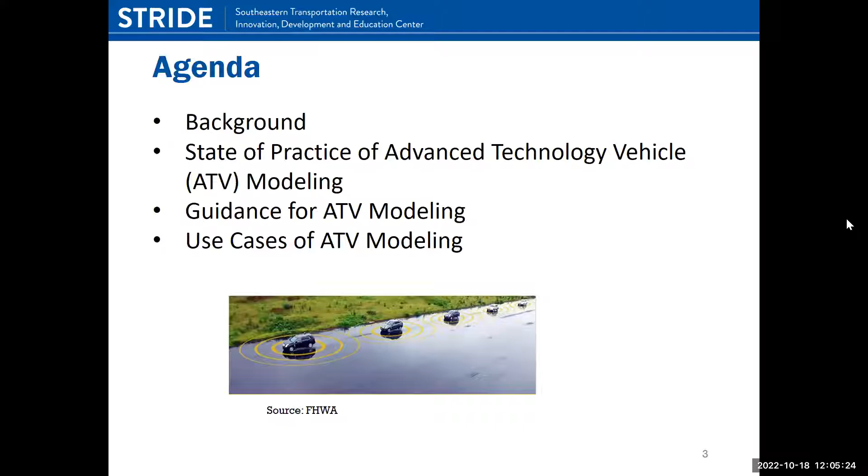So it's expected that traffic simulation will play a critical role in supporting the planning, design, operation, and management decisions of agencies, particularly since we don't expect that these technologies will be on the road for a long time, especially the more advanced features of them and the cooperative features that have not really matured enough yet. So for this reason, simulation will play a major role at this point in time to make decisions about the highway design and the planning and so on.

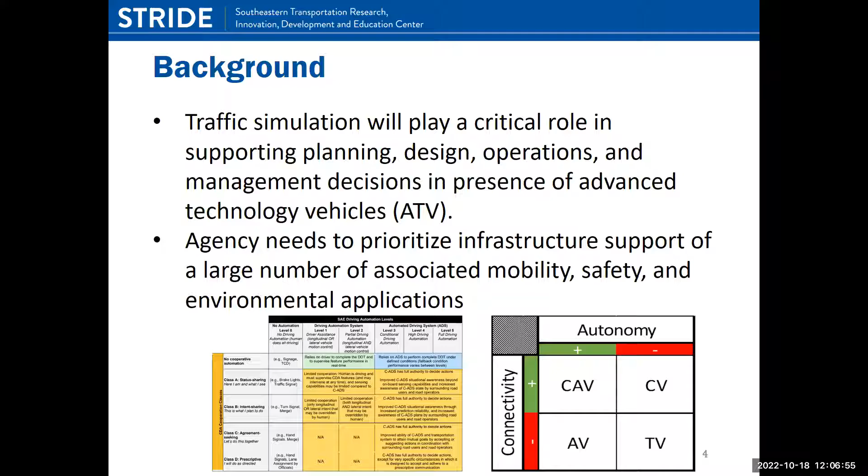The agency needs to prioritize their support, considering the limitation on the budget, and having different types of technology on the road, and each one of those technologies requires a different type of support. We need a simulation model that shows the impact of those technologies, both in terms of positive effects and adverse effects if you don't provide that infrastructure support, both the physical infrastructure and the digital infrastructure.

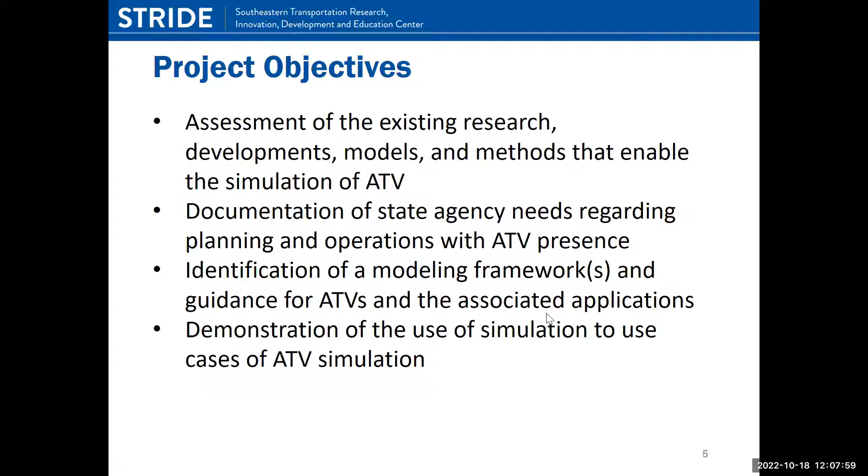So the objective is to assess the existing research, development, models, and methods that are available in the literature. The other objective is to document the state agency needs regarding planning and operation with the presence of advanced technology vehicles. And we use ATV rather than CAV or CV here because we think that this is a more inclusive term, since there are so many different types of cooperation, automation, connectivity, and even electric vehicles and so on. So we use ATV instead of CAV. The other objective is the identification of a modeling framework and guidance, and demonstration of the use of simulation for use cases.

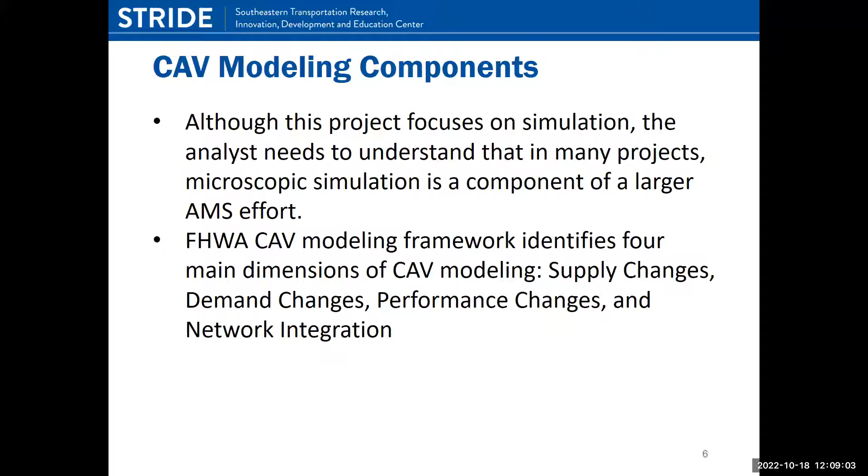Although this project focuses on simulation, it is recognized that the analysts need to have an integrated approach, thinking about all components of modeling that are needed, including how to model changes in the supply in terms of either policy or physical infrastructure or digital infrastructure, demand changes, which normally need advanced demand forecasting models and dynamic traffic assignment, and then performance changes, which we can do using macro, meso, or micro models. And finally, a network integration that combines all of these components.

An important part of this is the identification of the technical approach. Considering that we are in the early stages of simulation, we have to be thinking about what is the best approach to simulate these vehicles, and what is the best combination of tools that can and should be used. So there is no single tool that can provide all the functionality and all aspects of the CAV.

Many of them do not exist. Even in recent years, when they started incorporating some of the CAV features, the focus is more on specific things like dynamic merge, dynamic lane changing, or cooperative adaptive cruise control (CACC), but we realize that there are many applications of ATV or CAV that cannot be modeled.

Consider the operation at the unsignalized intersection and accepting gaps in the traffic, or even a permissive left turn, or red light violation warning, or control of vehicles so that they don't hit the red, or things like that. So all of these would require API type of modeling.

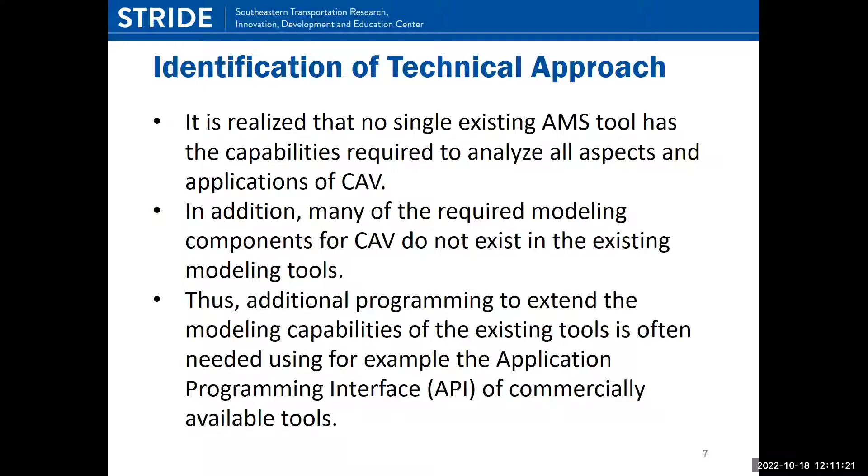Another important aspect of simulation of ATV is the amount of uncertainties associated with this. We don't know when market penetration will be realized for different types of vehicles. We have heterogeneous traffic in terms of connectivity, automation, and cooperation, in addition to different modes on top of that. So that will be an important uncertainty. Also, the algorithms themselves, both from the vehicle side and the infrastructure side, we don't know what the OEM's modules will look like for a lot of these applications.

We can assume, but OEM1 may have totally different use of the data than OEM2, and we may not be able to really replicate all of this. However, we have to accept something generic that represents this type of algorithm.

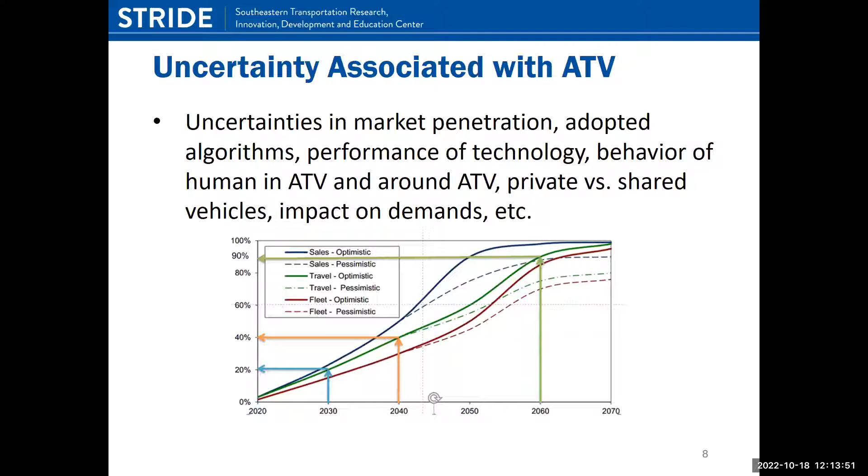Private versus shared mobility, that's also going back to what we said about connecting it to advanced demand forecasting models that can estimate those. Again, the impact on demand. Because of the ease of transportation, are people going to be more willing to use these vehicles, or are they going to travel less?

So, Mike, are you there? Yep. Do you hear me okay?

Yeah. Fantastic. All right. So I'm just going to do a really quick literature review overview and talk about a focus group we did with a number of folks from the state DOTs. First slide, I have absolutely no intention of reading this to you. I know better than that. This is just to let you see that there is a much more detailed literature review in the background. It is available as part of the report if you want to dig into it.

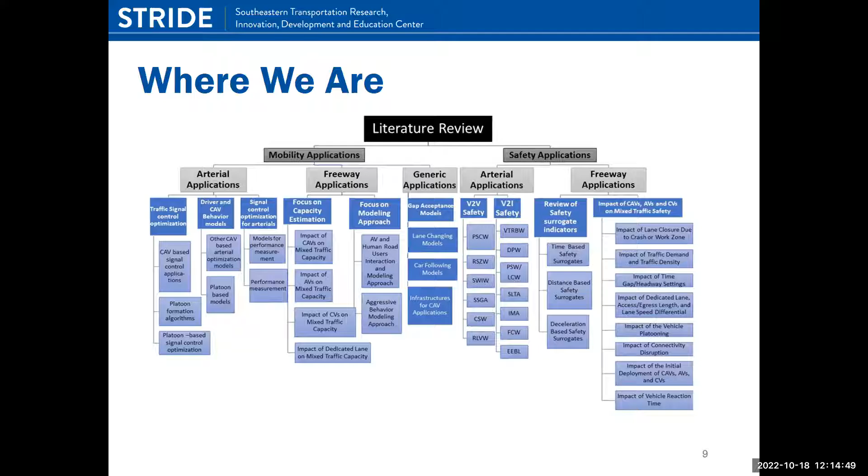What I'm going to get into right now is intended to be high level, a few of the bigger issues, particularly related to modeling and simulation. That is the primary interest in this project. And also, I'll acknowledge right off that this literature review was done probably over a year ago, which at this point, in AV, makes it almost ancient. But I think it still gives us hopefully some good insights. So you can go to the next slide.

So if we talk a little bit about the freeway side of it, there was a lot of literature on freeways. That seems to be one of the primary areas of interest. We did look at analytical, macroscopic, different versions of models, but microscopic does seem to be the tool of choice, at least when they're trying to get detailed operational studies.

And when you look at a lot of the studies, we found that the result is very dependent upon the assumptions. I don't think that's a statement nobody's heard before. We're not breaking incredible ground there, but it is very important when you're looking at these studies to understand the assumptions that they're making. One of the most important tends to be the time gaps.

So what are the gaps that are assumed between the vehicles, and vehicles of different types, maybe an AV as a lead or lag with a human-driven, or two AVs together, or CAV, or two CVs. Those assumptions really start to come into play in the operational and safety results that come out of these models.

We did find that it's still very typical for a lot of the CAV modeling to use a cooperative adaptive cruise control algorithm for the longitudinal control. Where the magic tends to come in is going to be in the lane changing and the weaving, where you'll find each different paper, a lot of different research, handling it in a different manner, how they're going to deal with that.

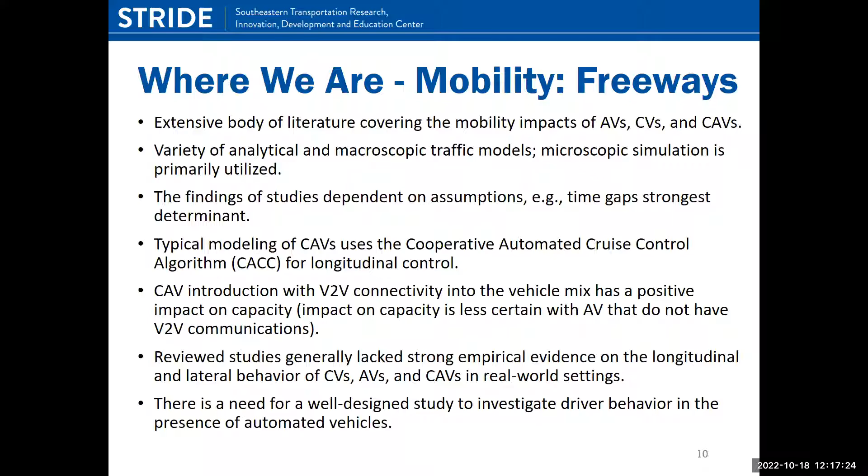We can think on the arterials, there's quite a bit of work looking at the idea of vehicle trajectory control and looking at how to optimize the individual intersections or potentially a corridor. And in that work, you tend to see a combination. Can you optimize trajectories and the signal control at the same time? You'll find work that looks at the individual trajectories. Maybe you could do some sort of platoon optimization, moving vehicles together.

So from a control theory point of view, there is a challenge still with a lot of this work, and then it does tend to be a bit more simplified. The phasings tend to be simplified, maybe not getting into permitted lefts or how to handle the turn movements and such. So as the work progresses and there's more work every day coming out, finding that complexity to better match the real world is becoming important.

It's also not necessarily clear in some of the work exactly, again, how the human drivers are going to be reacting, and are we properly capturing the impact of human drivers in these studies. And there have been some field studies that have done a good job of illustrating how complex this is going to be when we get into it.

Some of the significant gaps still seem to be tying in the sensing abilities and communications required to make these systems work: communicating with the infrastructure, communicating with the vehicles, and if there's a driver, what's going to be involved there. Some of the gaps we noticed are the realism of some of the models in capturing the capabilities and the various functions of the intersections, and looking at some of the methods that could be used to leverage CAV technologies.

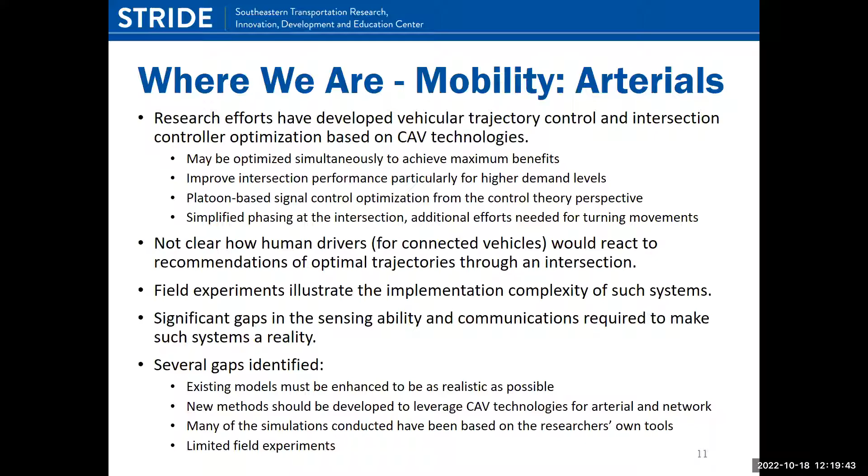Safety. Well, there's a lot on safety. Safety is one of the driving forces behind CAV. There's a ton of work out there on V2V and V2I and all the different variations. I'm not going to read all these, but you can find work on almost all of these. There's been testing on a lot of these. So this is definitely a good topic.

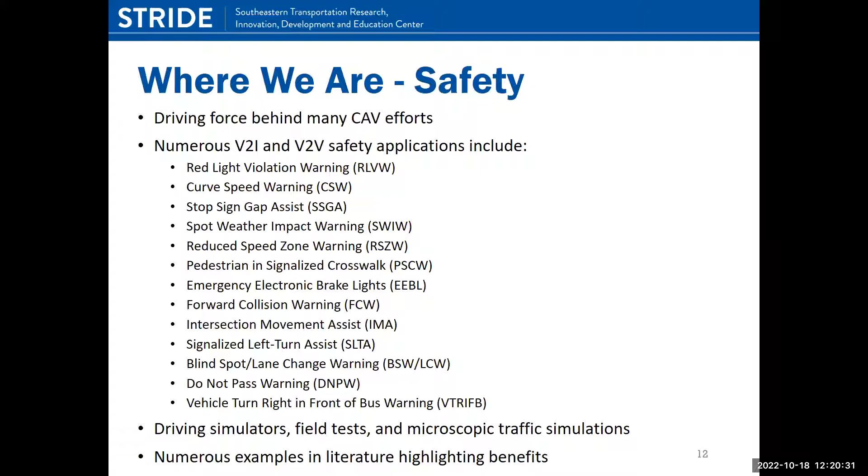A lot of the work has been done; there's also been work now done in driving simulators, there's field tests. A lot of this exists on cars that are being sold today. And then again, the microscopic traffic simulations, as we've talked about, seem to be sort of the place people like to go. And you'll see throughout the literature a lot of examples highlighting the benefits. Let's go to the next slide.

But as we get a little deeper and we start thinking about the CAV and the AV part of that, well, now there's not quite as much out there, and we start again getting into the assumption issues and the penetration issues that Mohammed was talking about earlier. And one of the ways people are trying to address this is through surrogate safety measures. They've been around for a long time. We all have some familiarity with that. The idea, of course, is combining the surrogate safety measures with simulation modeling to allow essentially a simulated version of the surrogate safety.

Surrogate safety, just at the highest level, we tend to be thinking about frequency, severity, and duration. We're trying to essentially get a sense of crashes, right? What's the likelihood? What's the severity? How long? Some examples: time to collision, reaction time, deceleration rate. There's post-encroachment time. There's a long list of these.

What we have found when you look at the literature is that research on applications using connectivity is stating that this can reduce response time, decreasing the conflict likelihood. Also, as the market penetration increases, you'll see a decrease in speed variation, again potentially reducing the likelihood of crashes. But we also did see studies that had conflicting results. We'd find some studies for, say, a low AV penetration rate that would say it might increase the number of crashes, and a study on the other side saying the exact opposite, that it decreases the number of crashes.

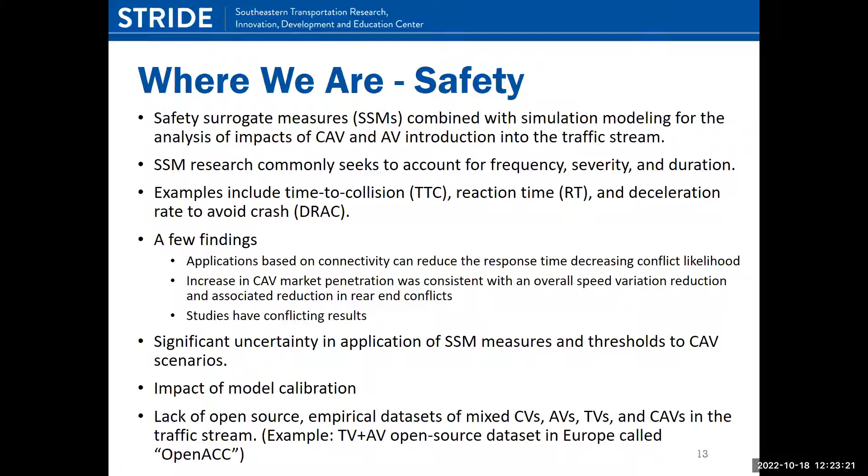One of the issues that then also starts to pop up is model calibration, and there is some discussion in our report about model calibration. That really starts to become important, particularly when you don't have significant field data sets. How does one calibrate? Now that is starting to change. There is a lack of open source data, although some data sets are starting to exist. I listed one example there that the team has been able to get hold of and is starting to look at. So those data sets are starting to become available, but they are still very sparse. I think it's going to be some amount of time before we have a really good sense of that. Can you go to the next slide?

So we did a focus group. It was November 2020. It was online with state DOTs, mostly within the southeastern United States. And we were focused on simulation modeling needs when it comes to AV and CAV technologies. The topics were broad. We wanted to talk about their efforts, their plans, their barriers, their challenges, really go through it all. Can you go to the next slide?

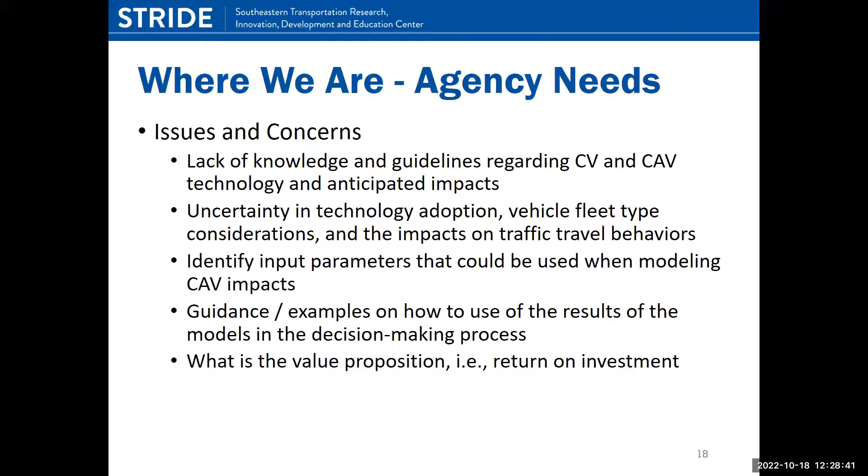Performance metrics. There was some good discussion on the performance metrics. I think one of the issues that was interesting to hear was really comparing the technology, what improvement you would receive when you use this technology versus if you just use sort of traditional improvements, or what's the marginal improvement of adding this technology to a traditional infrastructure system. And then also, how could you use this to maybe replace something that you would have done in a more traditional way?

So those comparisons, and again, you can see that sort of tie back to this return on investment and understanding. They found it very important that they wanted to assess both safety and mobility impacts. Although, interestingly, and I didn't put a specific bullet in, they said currently a lot of their deployments really aren't based on those assessments simply because they can't do it. A lot of the current deployments are based more on, we're going to try this, we're going to get out there, we're going to do the pilot test and see how this goes. They're not able to do these analyses ahead of time, but they want to do safety, mobility, impact analyses.

Another interesting question was, of course, how the technology is going to integrate with the current approval processes, such as interchange modification and facility capacity addition. Right, there's a standard set of processes. You have your environmental impact statements, and you have all these reports and analysis that has to be done before you do these large modifications. How do they layer CAV into all that?

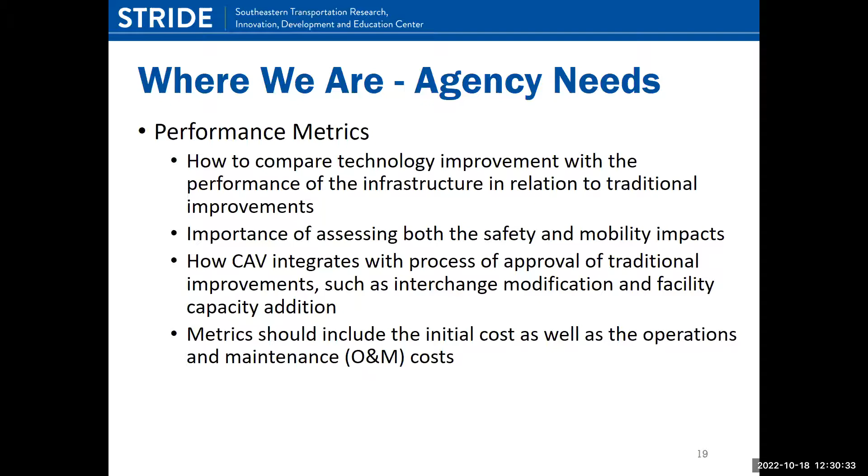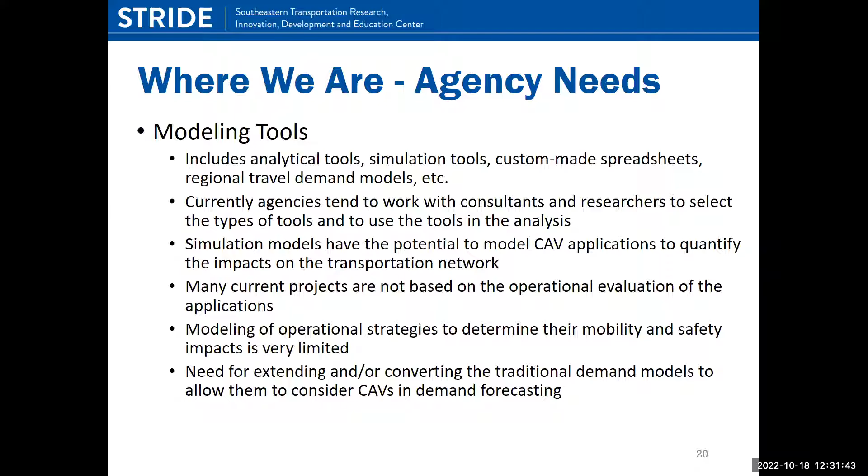I think that's actually my last slide. You go to the next slide. So that's sort of our update of what the agencies were thinking.

Thank you, Mike. So as Mike said, one of the main needs of the agencies that was specified was to have guidance on how to use these tools and how to select the tool and the approach and so on. So a major part of our effort was to develop at least an initial guidance that can be used as a living document, updated as we have more information about CAV in general.

What we did then is to start with the existing guidance from the FHWA. Many of you on the call are familiar with the FHWA Volume 3. This is the 2019 version that has basically 7 steps of simulation, starting from analysis, planning, and scoping, data collection and analysis, base model development, verification, and then calibration, and this is a mistake, calibration and validation, alternative analysis, and analysis documentation.

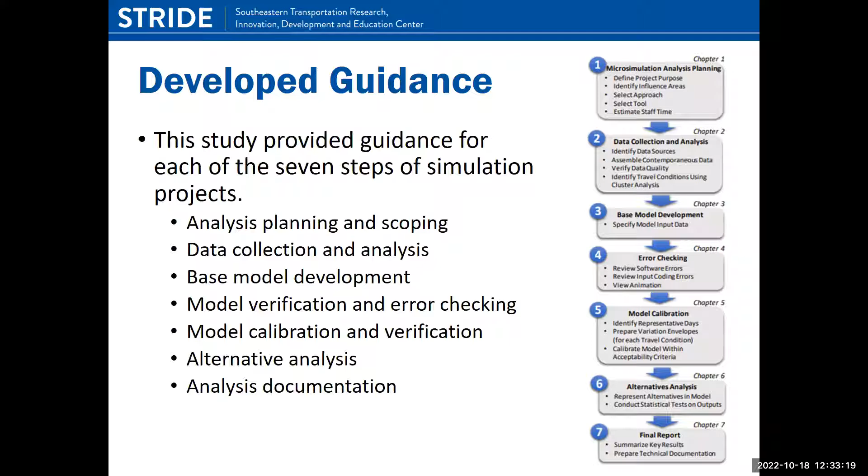So we just revisited each of these steps and inserted information that is specific to CAV. So for example, in analysis, planning, and scoping, we talk about the analysis dimensions and what the approach is for each dimension. By dimension here, we are talking about the level of the modeling or the component of the modeling. Does it include demand forecasting or the impact of the supply component, which is the physical and digital infrastructure, and so on? Does it include dynamic traffic assignment, route choice?

And then what is the approach to use that? How are we going to treat the uncertainty that we have been talking about up to this point? What are the performance measures? A lot of the performance measures that are used for regular traffic may be still applicable, but a lot of new measures are also important. For example, more and more stability metrics and other vehicle-level types of measures become important as we talk about the reduction in oscillation and so on, and looking at safety measures as an important measure, and so on. And then analysis tool selection, data requirement and availability, identification of the verification, calibration, and validation methodology.

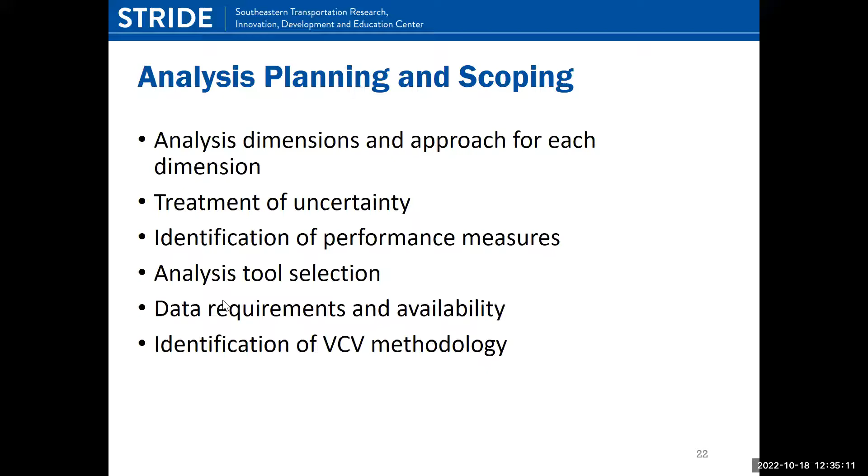So as we mentioned, there are approaches to modeling ATV, and we detailed that. So one option is to just adjust the existing model parameters through changing the parameters in the calibration process to reflect, for example, ACC and CACC, and that is something that was done in the recent releases of some of those tools that consider the behavior of those vehicles. So for instance, the Wiedemann model and TransModeler, the General Motors model has been fine-tuned. The parameters have been fine-tuned to reflect the car-following behavior of CACC and ACC, and same thing with lane changing, gap acceptance parameters, reducing the stochasticity to account that the vehicles are going to be more uniform in accepting gaps and lane changing.

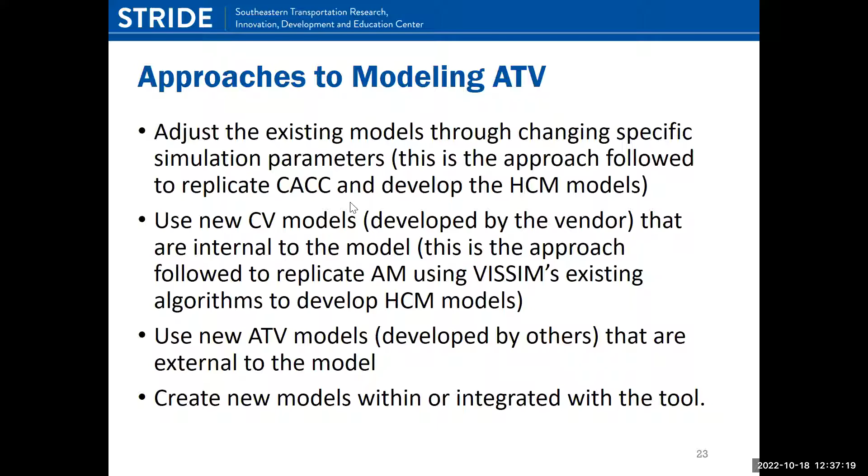Another option, if that is found to be not available for some of the applications or not adequate for what we are doing, is to use new connected vehicle models that are internal to the model. This is the approach followed to replicate VISSIM's existing model and the modeling of the car following and merging operation. Or use new ATV models developed by others, or create new models within or integrated with the tool. Also, there's opportunity for using software and hardware in the loop as part of the simulation to replicate as much as possible the performance of these ATVs. We also have done this after we produced the final report for phase 1. As I mentioned, we are working on phase 2.

So we compared some of the existing tools and how they model different types of applications or features of ATV. And the HCM and the tools that have incorporated the HCM procedures have procedures to account for the impact of CACC, cooperative adaptive cruise control, and dynamic merge, and so on, on the capacity using capacity adjustment factors. And they have those for freeways, signalized intersections, and also for roundabouts. This is the table that we took from the HCM.

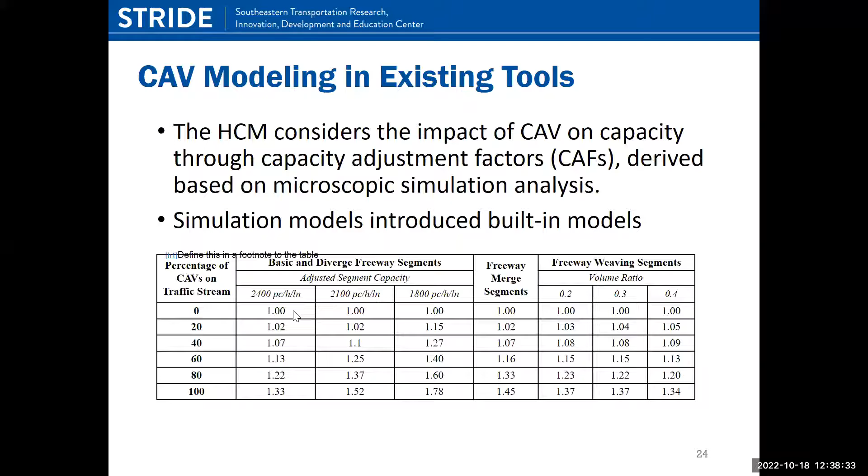But simulation models also introduced built-in models. For example, VISSIM contains built-in functions that allow the user to model 3 driving behaviors: cautious, normal, and all-knowing, based on data collected from the CoEXist project. The cautious driving is supposed to replicate automated, not connected vehicles, while the normal and the all-knowing are supposed to replicate the connected automated vehicle, with the all-knowing replicating more advanced features of cooperation and automation. And when we did the comparison between these tools, we found that the cautious driving actually gives you capacity that is lower than the capacity of human driving. And that is because they are more cautious when they don't have connectivity. The cautious is supposed to reflect the autonomous vehicle somehow.

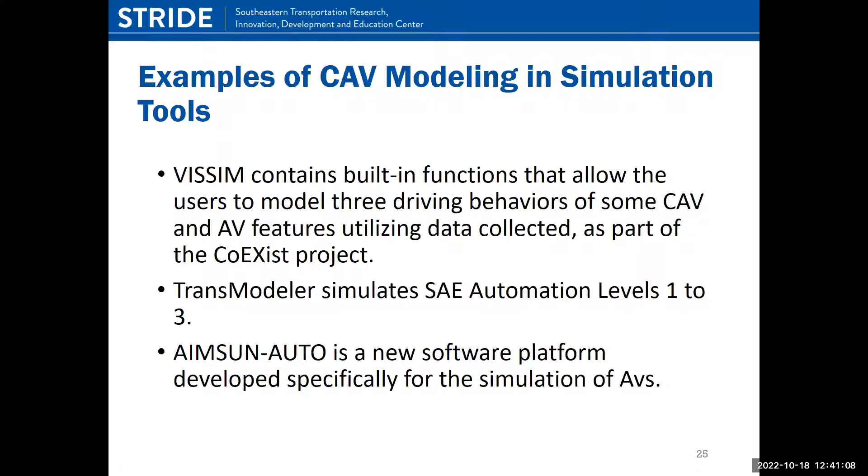TransModeler simulates 3 different levels of the Society of Automotive Engineers, and we compared the HCM with TransModeler with VISSIM, and we found that these tools produce, in a lot of aspects, totally different results. Although some of them, when you change the parameters, can get closer. So the conclusion is that one needs to be careful when using existing tools and be sure that they produce compatible results. A lot of the time people use Highway Capacity Manual procedures for screening of the alternatives, and then they use the simulation model for more detailed analysis of the alternatives. But if the two models produce different results, then you will find that the findings from the screening do not support what the detailed simulation is finding. So that's something that modelers have to be cautious about.

Calibration and validation: additional calibration measures are needed, maybe at the trajectory level and so on, compared to the human-driven, where we used macroscopic measures rather than trajectory measures for a long time. Although we now also have a recommendation to get more into trajectory-level calibration.

The calibration should be done for different conditions, such as different congestion levels, lighting, and adverse weather conditions. When considering ATVs, field data may not be available. In those cases, we need to depend on literature and information we get from technology developers. And then it's always good to compare the results from our analysis with what was reported in the literature, to be sure that we are not producing results that are illogical because we assumed something that is not.

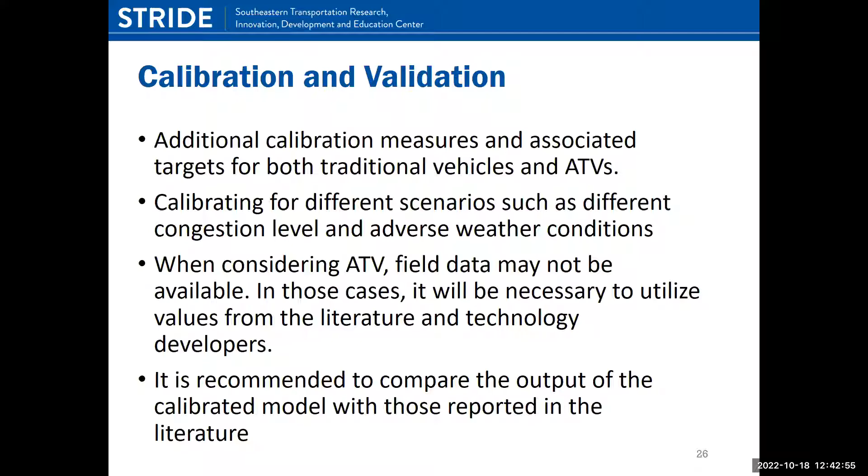For example, if the literature or even the Highway Capacity Manual says that the CACC capacity modification factor was 1.6, that means a 60% increase in capacity. Then if our model tells us that the increase in capacity is 200% or 150%, there is something wrong in our assumptions there. Alternative analysis is also important.

It should consider, depending on the objective and scope, supply, demand impacts, and performance impacts. So, I should have said there, depending on the scope, an analyst must seek to gain the latest knowledge or sense regarding various ATV indicators, such that we can compare and try to get the best estimation of those indicators.

And then sensitivity analysis is recommended for alternative analysis because of the large amount of uncertainty. So then you can do a risk analysis or sensitivity analysis, and then from those you would recommend the best alternative, rather than depending on one run with one assumption. You need to have an assumption from a distribution rather than one deterministic kind of assumption. And that could include the market penetration and also the performance of the ATV in accepting gaps and car following and so on.

But the recommendation, if we're going to do sensitivity analysis, is we should test the boundary conditions for each characteristic while fixing the other ones. Obviously, you could do more detailed analysis that includes risk analysis with Monte Carlo simulation, but that requires a lot of computational effort and so on.

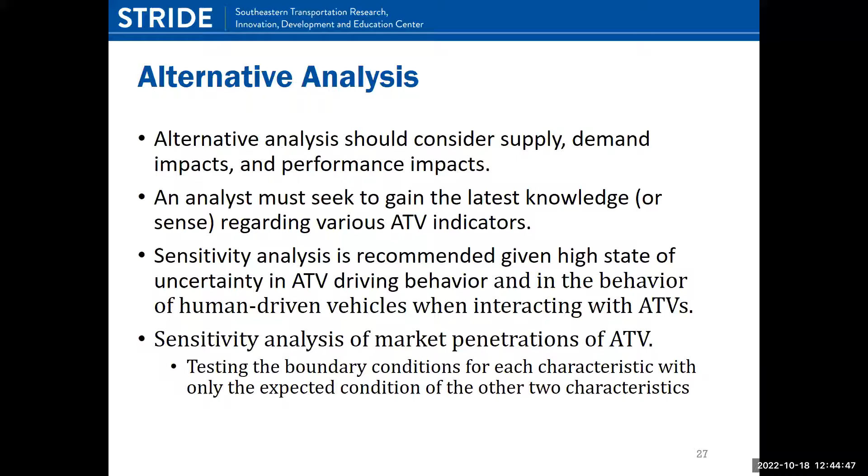The case studies that we did for this project can be divided into 3 major themes: arterial safety, arterial mobility, and freeway mobility. Under arterial safety, the case studies that we investigated included red light violation warning, unsignalized intersection gap assist, and signalized intersection left turn gap assist. The freeway mobility case studies included CAV operations in mixed traffic, where we have AVs, TVs, CVs, and CAVs. The second case study investigated the impact of a dedicated lane for freeway operations in the presence of AVs and CAVs. And the last one looked into optimizing operations at freeway weaving segments in the presence of ATVs.

The arterial mobility case studies were 2, and they explored signal control optimization and evaluation of operations and environmental quality at interrupted flow facilities. As Mohammed mentioned, we won't be able to go through all of the 8 case studies that we did for this project. I'm just going to cover 2 of them here: the red light violation warning and the impact of dedicated CAV lanes. Can you go to the next slide, please?

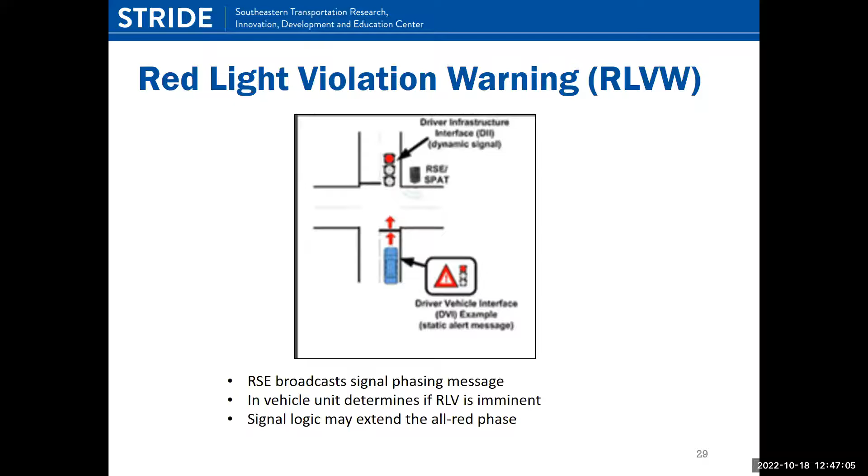So coming to the case study objectives and methods, the main objective of the red light violation warning was to assess the safety benefits of this technology. In order to do this, the team needed a baseline stopping probability at the start of yellow that could be used for calibration of the simulation model, and also a robust method of quantifying the impact of red light violation warnings. For this, the team relied on surrogate safety measures.

Moving on to the methodology part, this study was a simulation-based study. The team used VISSIM's COM API to implement the red light violation warning. The model parameters that impacted the probability of stopping were identified first, and then using the previous research, the baseline model was calibrated to match field stopping probability. Following these steps, the red light violation warning safety effects were evaluated using SSMs.

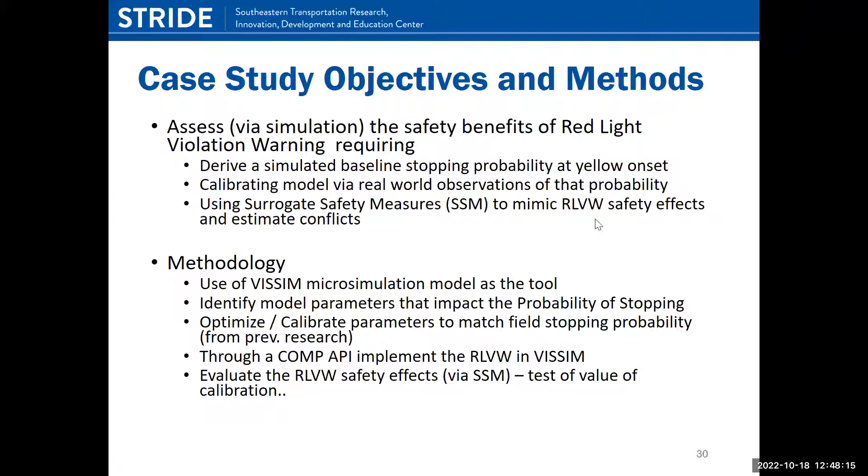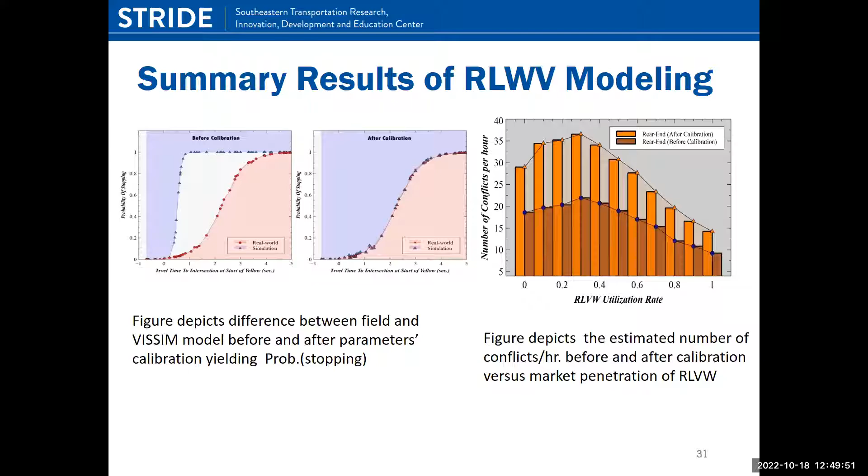Changing gears to the second case study, which is assessing the effect of CAV dedicated lanes on freeway operations. As we expect, AVs and CAVs will impact mobility, safety, and the environment. And based on the review of the literature, the impact is expected to be positive at high market penetration rates, and there's a consensus of the studies that have looked at this. But at low market penetration rates, however, there's no consensus, and the majority of the case studies show that there's a negative impact on mobility and safety.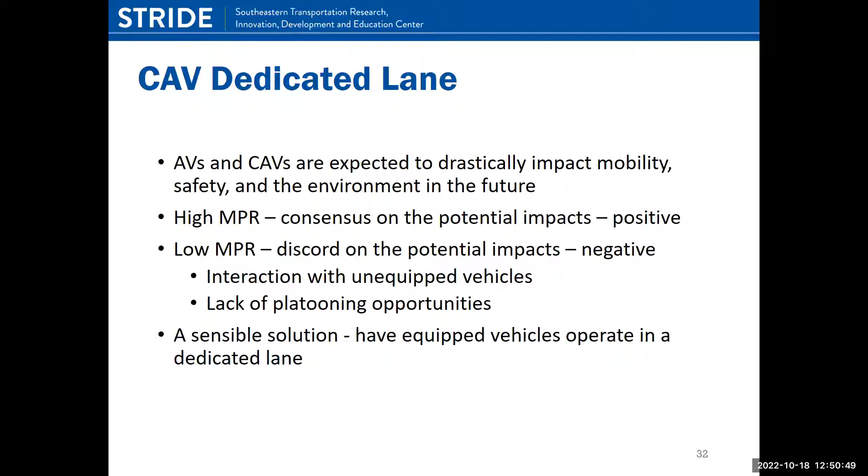Two factors could probably be the reason contributing to this disparity and the negative impact: interaction with unequipped vehicles and lack of platooning opportunities. A sensible solution would be to put these equipped vehicles and operate them in a dedicated lane. Next slide, please.

Again, we conducted a simulation-based study to investigate the impact of the dedicated lane on freeway mobility. We simulated a real-world freeway facility located in Raleigh, North Carolina, in SUMO, which is an open-source simulation tool. The facility had 3 lanes in each direction, and the leftmost lane was dedicated to CAVs, while the right 2 lanes were used by other vehicle types. We had 4 vehicle types in the case study, including AVs, CAVs, TVs, and CVs as shown here.

The longitudinal behavior of the 4 vehicle types was modeled differently. For AVs and CAVs, we used W-99. For TVs and CVs, I misspoke there, I'm sorry. For AVs, we used Xiao et al.'s model, and for CAVs, we used Xiao et al.'s and Milanés and Shladover's model. Next slide, please.

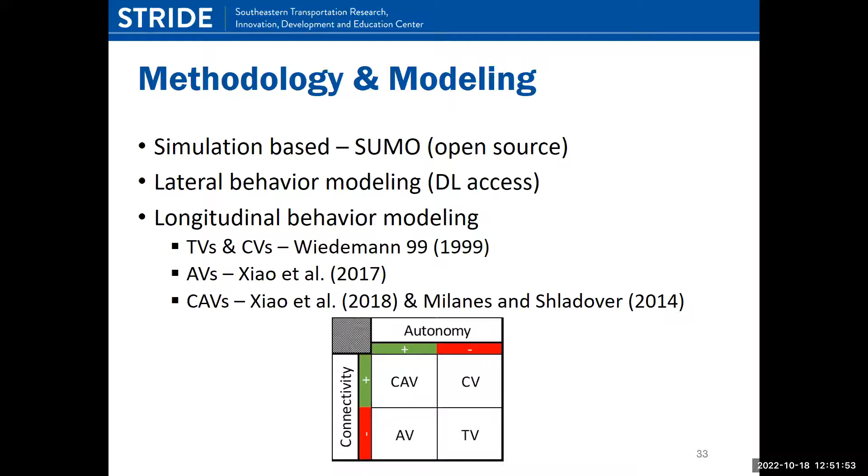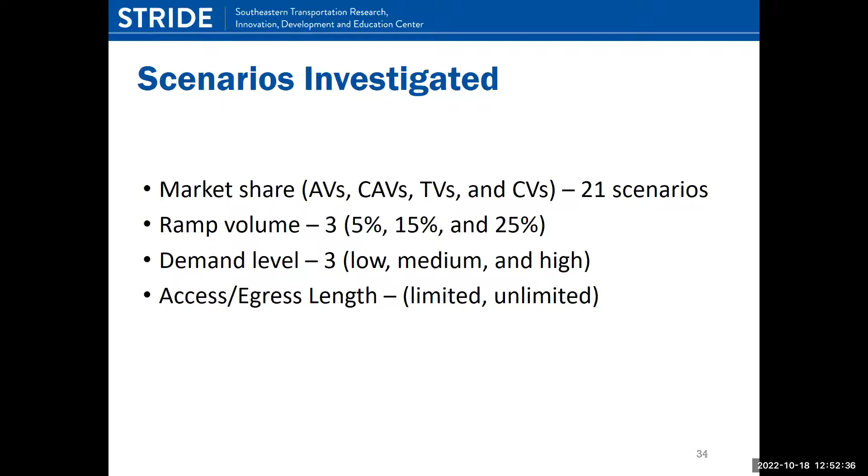Moving on to the scenarios investigated, this case study looked at different factors such as market penetration rate, ramp volume, demand levels, and access egress lengths and policies. The total number of scenarios we looked into was above 300. In terms of market penetration rate, we had 21 different scenarios that included a combination of AVs, CVs, TVs, and CAVs. On the ramp volume side, we looked at 3 different volumes, 5%, 15%, 25%. On the access and egress, we looked at 2 different policies, limited and unlimited. Can we go to the next slide?

All right, this slide shows the findings of the freeway merge segment. The 2 heat maps that I have here show the throughput difference between base case and dedicated lane. The left heat map is for limited access. So in limited access, vehicles can enter and exit the dedicated lane at certain locations. And the right heat map is for the unlimited access case, where vehicles can enter and exit the dedicated lane anywhere on the facility. Some observations that can be made from these 2 heat maps are that CAV improvement ranges between 20 and 60% of market penetration rate for both of the access and egress policies.

We see minor benefits at low market penetration rates for the unlimited access case, which is on the right side. This is potentially because the CAVs are not using the dedicated lane and they're merging and using the general purpose lanes. And lastly, unlimited access is beneficial when the dedicated lane is close to the operating capacity, let's say between 40 and 60%. I haven't shown the results from other freeway segments and facilities, but we have seen similar observations for the diverge, weave, and basic freeway segments.